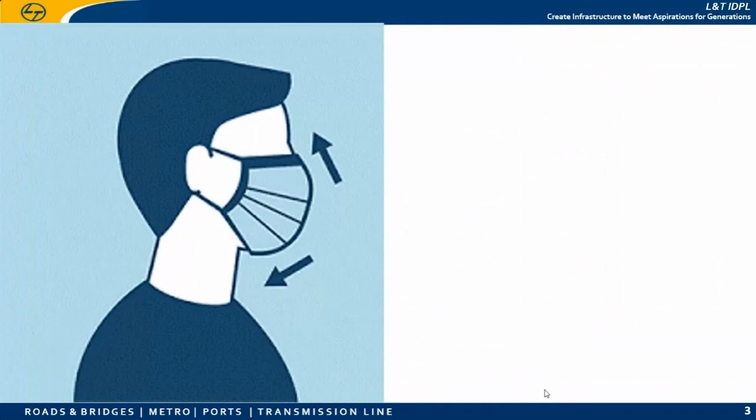Okay, so these two entry points are covered by using the mask. The same way, my dear friends, you have to provide adequate number of cover blocks at adequate locations. Before concreting, it is the duty of the site supervisor or site in-charge to ensure that adequate number of cover blocks at adequate location is very, very essential.

Now sometimes our people wear a mask covering only the mouth, but leave the nostrils open. But my dear friends, microorganisms can easily enter through any entry point, whether mouth or nose. If you close only one entry point, it will find the other.

The same way, my dear friends, if you do not provide cover blocks uniformly at adequate number and adequate location, then due to inadequate cover, wherever the cover is less—whether the requirement is 40mm, 50mm, or 75mm—that particular region will easily get infected.

Infected means it will get easily deteriorated. So what will happen? The rate of pH deterioration will be higher at those points, and the rate of corrosion will be very severe.

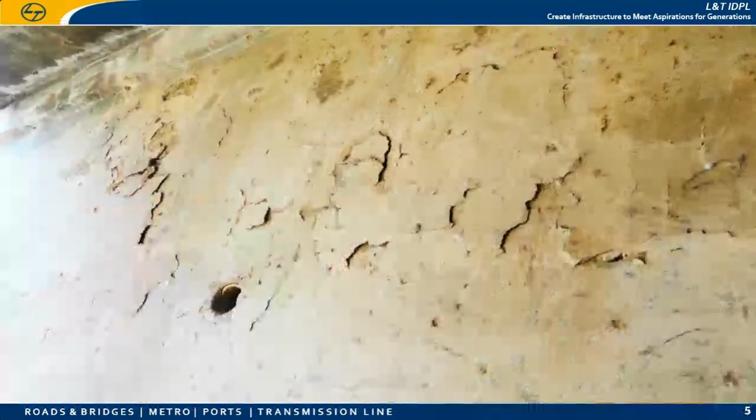Please keep this in mind. Now you see this another photograph, where the cover concrete is slowly peeling off, and if this condition continues, all will spall out. Now you see why a crack is running parallel to the reinforcement.

So why does this crack run parallel along the reinforcement? My dear friends, as I told you, due to the corrosion process, the volume of the steel gets increased. So when the volume increases, what will happen? It will develop a tensile force.

As everybody knows, concrete is very weak in tension. So due to this increased tensile force, a crack will be developed along the length of the corroded steel bar. That is why in a column, whenever you see a

parallel vertical crack, that may be a crack running along the reinforcement. So it is one sign showing that the reinforcement embedded inside is corroded.

Now, stains—so when you see stains on the surface, that is also another sign of corrosion. You see a crack running parallel to the reinforcement here. See, it is running parallel.

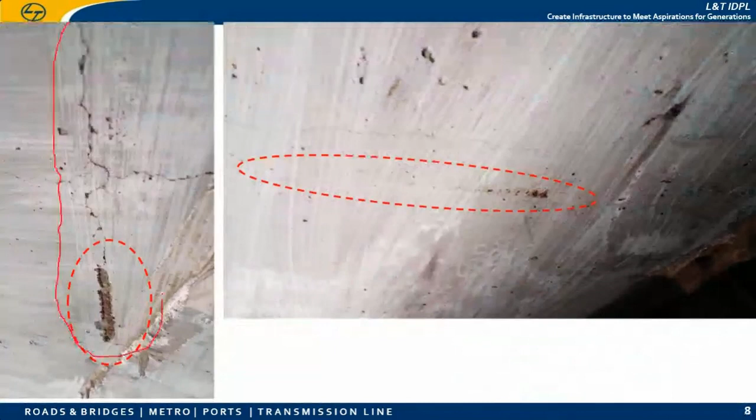Okay, so therefore the cover is very less. Wherever the cover is very less, deterioration will happen there. So the signs of corrosion are peeling of concrete, spalling of concrete, cracks running parallel to the reinforcement, and stains.

So my dear friends, I hope this is the bridge that you have seen in Nagapattinam. Am I right, sir? Am I right, sir? Yes, yes, it is. Sure, sir. Yes, it is, yes.

My dear friends, you have to ask yourself a question—why suddenly does a bowstring span appear? It is a continuous bridge constructed along the backwater. I hope the sea is here, so this is a backwater flow.

Why suddenly a two-span bowstring section, whereas adjacent spans are beam type? In buildings we call it a beam, whereas in bridges we call it a girder. Why suddenly? The purpose is, my dear friends, there will be some navigation—the boats which catch fish have to come and cross this bridge.

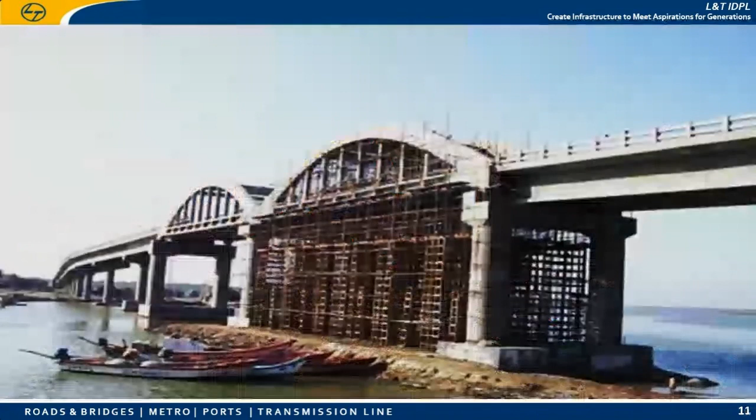I'm sharing a photograph taken during construction of the bowstring bridge, where you see how closely the supporting arrangement, props underneath, were provided to withstand the dead load of the superstructure. This was general practice in olden days because if a span is 50 meters, you can restrict the total superstructure height to 1.5 to 2 meters. So with this type, vertical clearance is maintained even at high flood level or high tidal wave level. That is why in this particular bridge, they provided two spans for navigation purposes, to accommodate rising water levels. That is the main purpose of introducing two bowstring spans.

How do these forces interact? It's something like how children play with a bow. In this bow, force acts in one direction toward this support and this support. This is the tie beam - like how you tie the bow with a thread from one end to another. That thread we call the tie beam. So in this tie beam, the force acts like this.

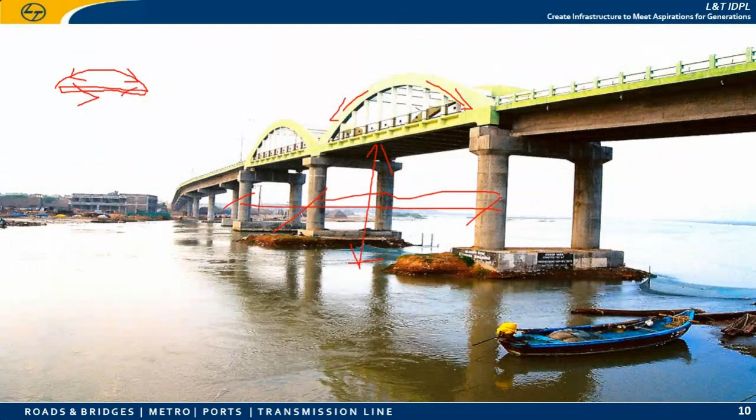In between, to increase stiffness, you introduce hangers or suspenders. The suspenders behave like a column, and the force distributes accordingly. So you can design with any sort of arrangement, provided you understand a clear picture of how the forces are distributed.

One more point to highlight is the superstructure. This photograph was taken after completing the painting of the superstructure. Why is painting required? Because you already provided adequate cover, which is like already having good immunity power. But why are you asked to wear a mask or wash hands even with adequate immunity? Simple procedures prevent infection, or minimize and delay the process of infection. The same way, in addition to adequate cover provision, painting externally is important.

As I mentioned in the earlier slide, there are three stages where concrete is continuously impacted by carbon dioxide, and since it is very close to the seashore, the chloride effect will be more. Therefore, an additional protective layer of paint, such as anti-carbonation paint, is essential to protect structures very close to the seashore. This is during construction.

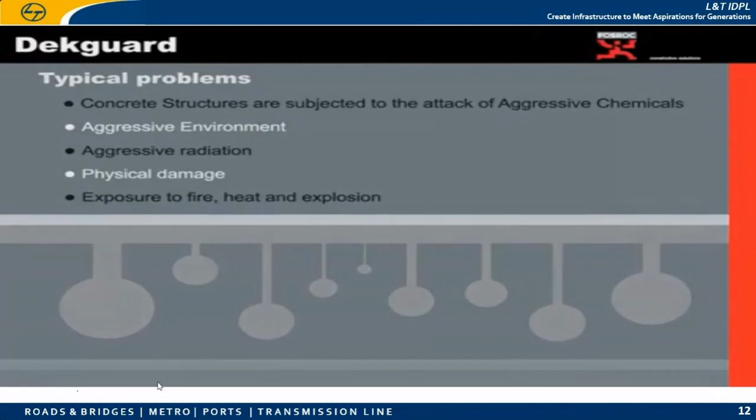To compensate or overcome all these problems, there are factors: moisture, breathability, UV resistance, aesthetical appearance, user friendliness or ease of application, flexibility, economics, durability, and last but not the least, environment friendliness.

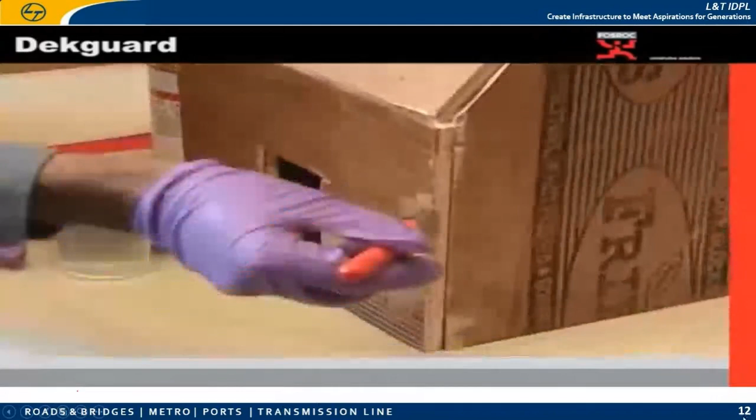The coating comes in 2 layers. The first is a silicon silane based primer, which is colorless. Since it's colorless, the main purpose of this product is it gets impregnated inside the concrete structure and prevents moisture from entering inside the building. Application is as shown. Once primer is applied, leave a drying time of minimum 5 to 6 hours. Once the primer is dried or impregnated inside the structure, then top coat is applied.

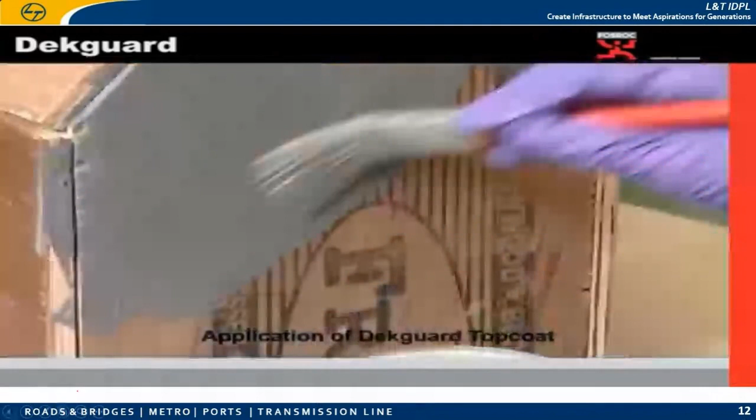Top coat normally comes in any color. It's a decorative coating. Before application, the product has to be mixed thoroughly, then applied like a normal paint on the drying surface. Being a decorative coating, it comes in any color suiting the customer's requirement. This product is generally acrylic based, which prevents the structure from carbon dioxide, chloride ions, sulfate, oxygen, and water ingress inside the concrete, thus making the construction a healthy construction.

To reinforce, Dekguard is basically a high-performance aliphatic acrylate dual-layer protective cum decorative coating system to protect the RC structures.

So this is a small video enhancing your understanding of the process of anti-carbonation painting, or protective painting, done on the surface of the concrete to minimize and reduce the rate of deterioration on the concrete.

My dear friends, you may think, sir, it is a painting, it is not an engineer's job, it is only a painter's job. But you have to clearly understand that the process of painting is defined by the engineers only. So you have to be very well thorough about the process, step by step procedure.

First the surface has to be prepared, then you have to apply primer. What is the curing period between the primer and the first coat of the actual anti-carbonation paint? Then if required, a second coating can also be taken up.

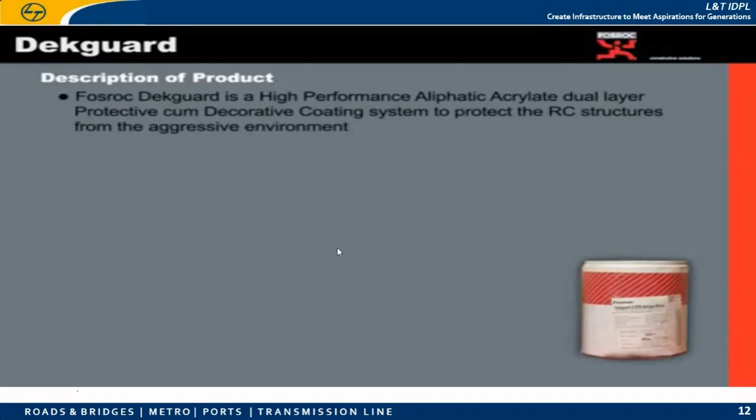One more important thing is, whenever you go for these types of procedures, first you have to see what is the date of manufacturing, what is the shelf life, and what is the expiry date. All these things have to be noted down.

What is the service life of the concrete structure? It is 100 years design life, which has to be met. So for that, maintenance is very, very important.

The responsibility - most people think the term quality is not related to the design office, that quality is related to site. It doesn't work like that, because the quality has to start from the drawing room. You have to qualitatively prepare the scheme, the detailing, and the procedure step by step, and that procedure should be user friendly.

You have to deliver all the details in such a manner that the site people are able to understand, because the language of civil engineers is drawing. So you have to be very clear in the deliverables. And prevention is better than cure - therefore, clear maintenance: routine maintenance, periodical maintenance, critical maintenance.

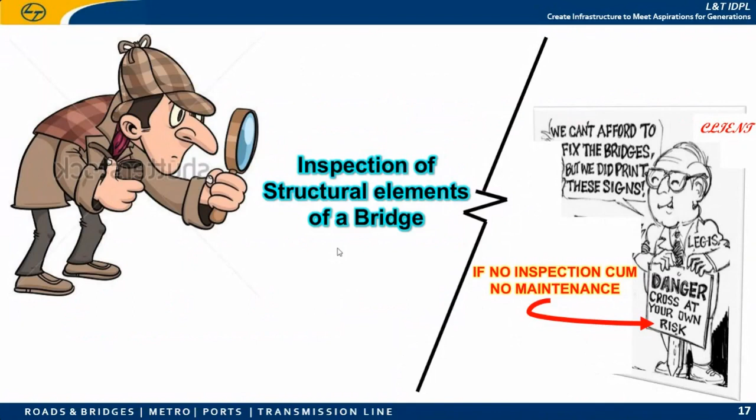So inspection of the element is very, very important. If the engineer only relies on what he hears or sees through mobile photographs, he cannot take a call. He or she has to inspect the site and understand the problem, just like doctors deal with patients, because here the patient is your structure.

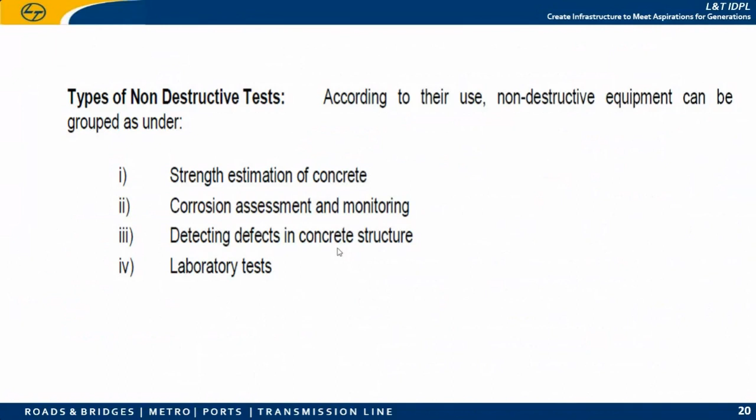Now, NDT we have explained earlier. This slide describes why NDT is required to estimate concrete strength, corrosion, and defects. The concrete surface may look very clear, but based on the surface look alone you cannot take a call. The inside structural concrete should also be free from voids, free from pores, and free from cracks.

Then similarly, cover meter. This test is not suitable to understand any of those things. You may ask, why is this test required then? My dear friends, cover meter is equipment that enables you to understand the actual cover. Your drawing may say 40mm or 50mm, but whether it is actually adopted at site, the cover will be seen and mapped. It's something like an ultrasound scan - you can see on the monitor the actual cover, the diameter of the bar, bar location, and bar spacing. Everything can be mapped using a cover meter.

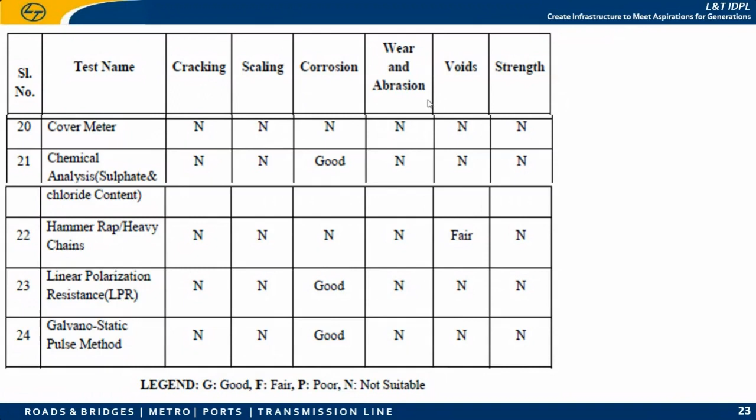Now UPV, even nowadays all colleges have an ultrasonic pulse velocity test. This is the test to understand the quality of concrete placed, whether it is free from voids or internal cracks.

So it has two transducers. One will be introducing the current, another will be the receiver end. It's the same formula as velocity equal to distance traveled by time taken. So the receiving end and the sending end. Whatever you see in this photograph is an indirect test. There will be a direct test where you can keep the receiving end of the transducer opposite to this location. Sometimes the site condition may not allow you to do a direct test, keeping your transducers opposite to each other, so therefore you have to go for the indirect test.

So based upon the velocity, you see that 4.5 above means it is excellent, that means the condition is good. When the condition of the concrete is good, then it will have the design strength, the characteristic strength. If it is below 3, it is poor. That means even though the surface looks good, internally it is having cracks, it has voids.

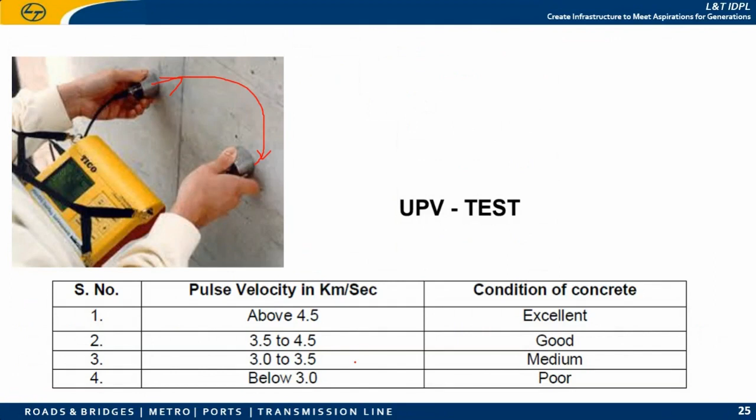Now then there are a number of other tests. The concrete core test is one of the laboratory tests, pH value test, chloride content test, sulfate test. So as per the need, the engineer in charge has to choose the respective testing.

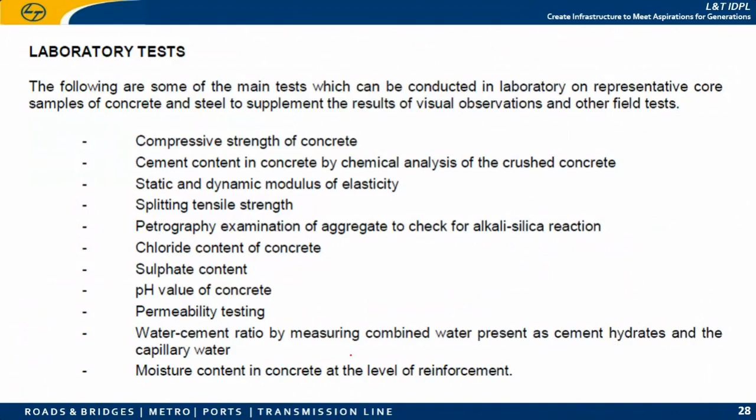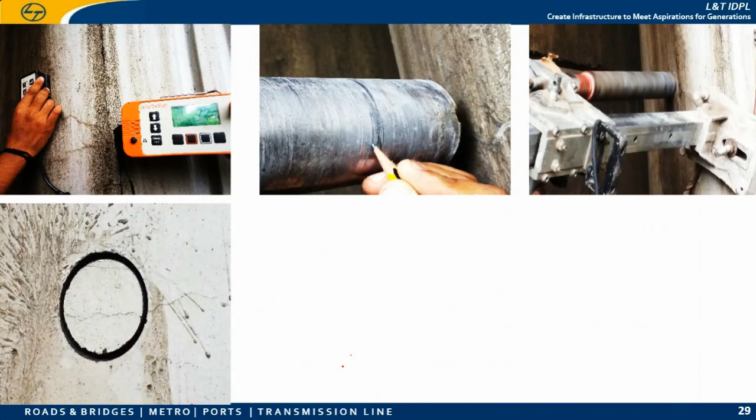Then you have to fix the drill bit on the concrete surface and start the activity. Then after completing, you have to remove the drill bit and take out the sample, just like how you take a piece of cake while cutting a cake. The same way you have to take it out, so there's no damage to the core. After taking out, you can see internally it is completely free from voids and steel is not exposed, therefore it is good.

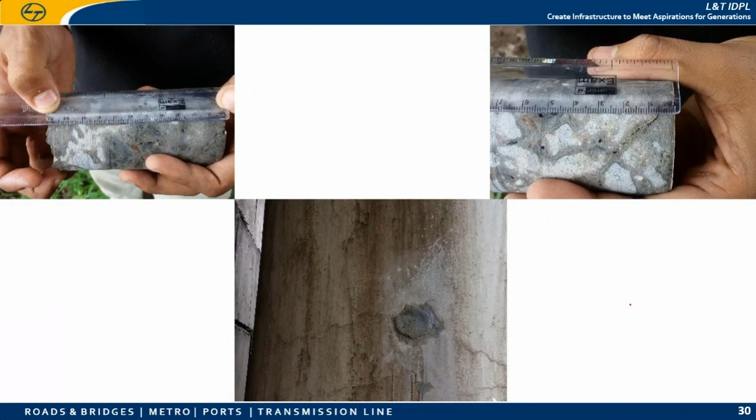Now, after taking out, if any cracks are there, you can even measure the depth. Then after taking out, it has to be completely sealed. You should not leave it as a void. It should be completely sealed with micro concrete or epoxy concrete so that it meets the parent concrete strength. So when you are filling it, you have to apply a bonding agent, because the bond between the new concrete and the parent concrete should be enabled. Therefore you have to apply bonding agent, then only you have to fill it.

So now this is the video where you will see the drill bit activity.

Madam, is the video visible now, madam? Yes, sir. I have just muted the sound. So you'll have a huge sound, so in order to protect your ears, I just muted it.

Okay, so this is how the activity of coring. Suppose your site condition doesn't permit you to go for core cutting. Now in that case, sir, how can I ensure the strength of my concrete implemented at the component?

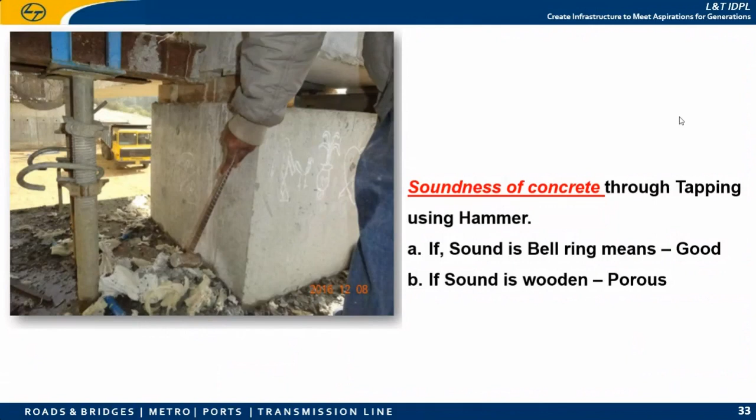Now this is another video of how to do the cracking repair.

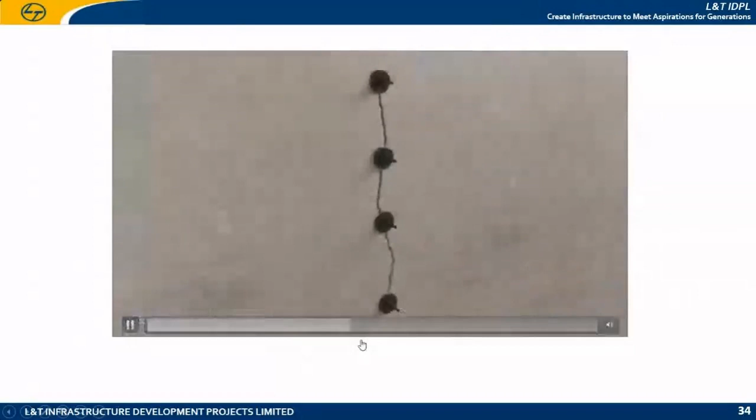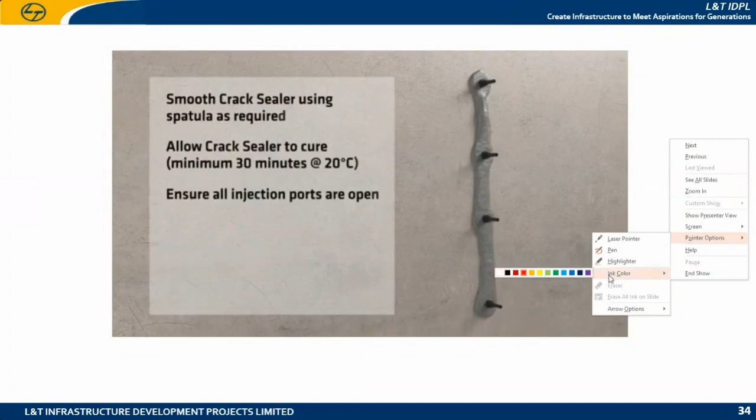My dear friends, in this video, you can see they are applying the repairing material. It may be epoxy resin or even PMC, whatever chemical they are injecting. Now what is the purpose when they are providing some injection point? Why is it necessary to seal this? Because whenever you are injecting here, the outflow should come out only at this point, it should not come out in between. So that is why they are sealing the surface all along in between the gaps, the ports, all along the length of the crack.

It is completely sealed, so that when you inject at this point, against gravity, this resin flows. You have a fast flowing resin and a low viscosity resin also, so as per the site condition, you can select it. Even a 0.1 mm width crack can be closed. So when you are injecting, it will slowly move, and if this area is not sealed in between the ports, whatever you're injecting will come out and will not pass through the other areas. That is why, after fixing the port, the outer surface along the length of the crack is completely sealed.

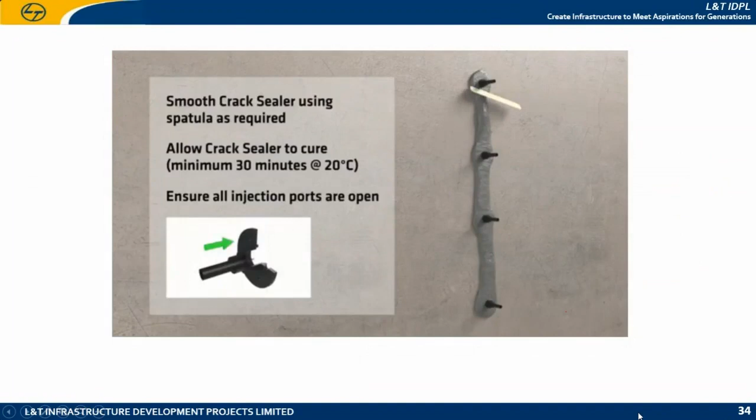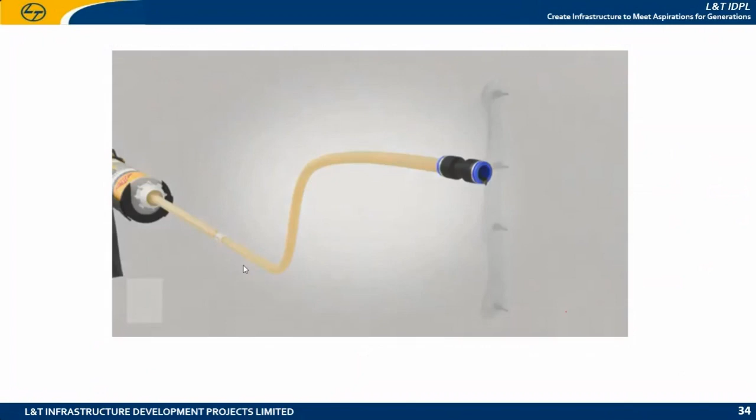One minute. And it is leveled. Why this is done: before applying, you have to ensure that no foreign matter is present in the flow of the tube, or that it should be free from air bubbles.

So my dear friends, in this way you have to seal the crack.

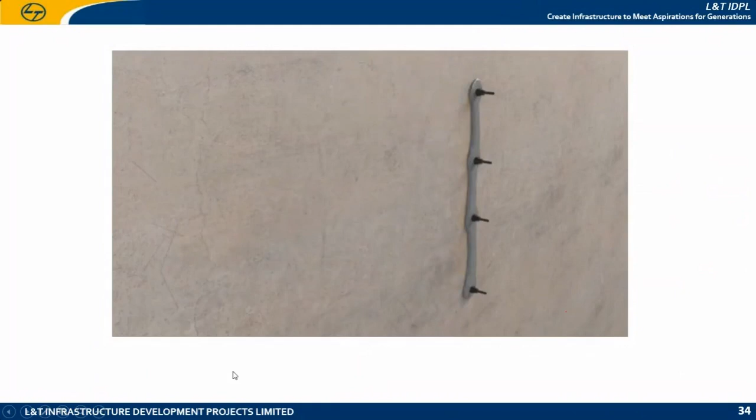My dear friends, this method cannot be applicable for all cases. First of all, it is the duty of the engineers to understand whether it is a structural crack or non-structural. Repair is the term which involves the process of restoring some damages. The damage may be a crack, or it may be removal of tiles and replacing them. So this term repair doesn't involve the strength parameter.

Okay, my dear friends. Now I'm going to share these upcoming slides with application of how the cracks are sealed with the help of monomer. Monomer is one type of polymer. It is used to close the crack under the honeycombs.

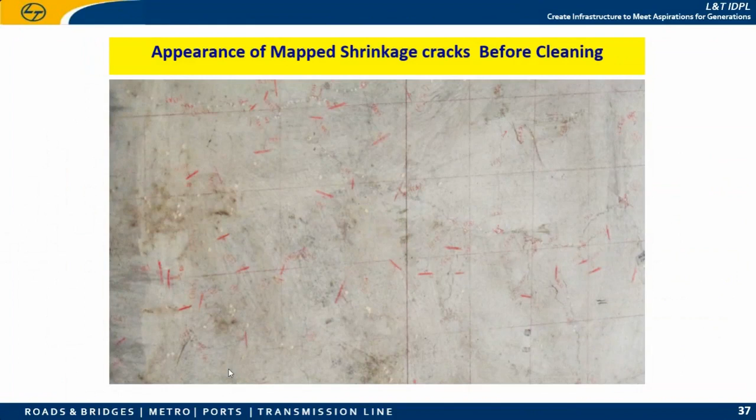Now, first you have to map the cracks, whether it may be a shrinkage crack or plastic shrinkage crack. These are all applicable only for non-structural cracks. Then after mapping, it should be cleaned. Step two, the surface has to be prepared.

Sir, you can say when the code itself is allowing, why do I have to go for crack sealing? Because through these cracks, these are all something like gateway openings where you are welcoming moisture to penetrate, where you are welcoming carbon dioxide to penetrate inside, because concrete is a porous material, so it will easily enter inside and increase the rate of corrosion. It will affect the good structural concrete, it will affect the good structural steel. That is why it is always necessary to seal the surface crack.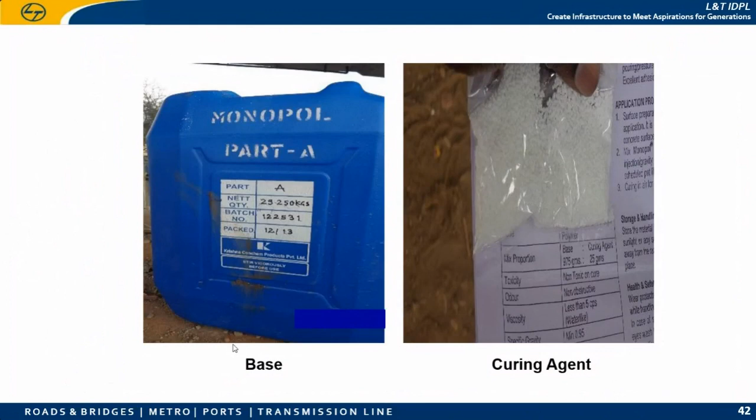Now this is the view of that Monopol polymer resin inside the container. My dear friends, when the mixing of the material has to take place, you should not mix it with a wire brush or with a stick. It should be mixed using a mechanical mixer, because uniform mixing is also very, very important in playing a vital role to meet our requirement, because all these are chemicals. So a small error, a small mistake at any level of application will always result in not achieving the purpose or design strength.

So the pot life of this material is only 30 minutes. When you open the container and take the liquid out, you have to apply it within 30 minutes. Otherwise, it will become like a gel. So the site supervisor or in-charge has to keep in mind 3 things: one is the manufacture date, what is the expiry, and what is the shelf life or pot life.

Now, when you come across a sunken slab, what is the procedure? This is something related to our childhood days. We might have studied a story where a crow will come and stand on a pot, and the water will be at the lowest level. So what it will do is take a few pebbles from the nearby area and keep on adding them. So the volume of water will rise due to the addition of pebbles, and it will come to the level where it can easily take the water through its mouth.

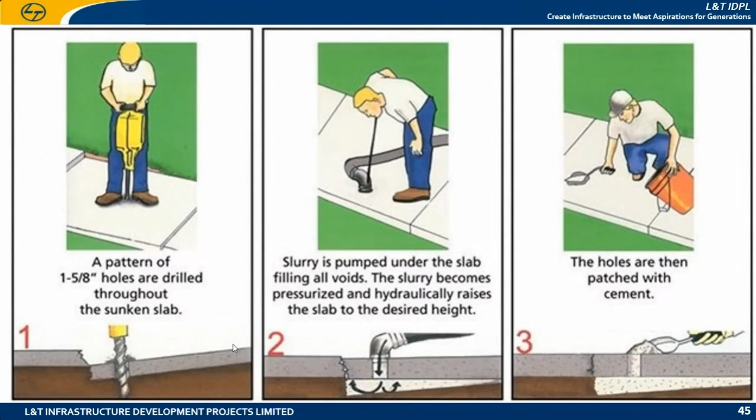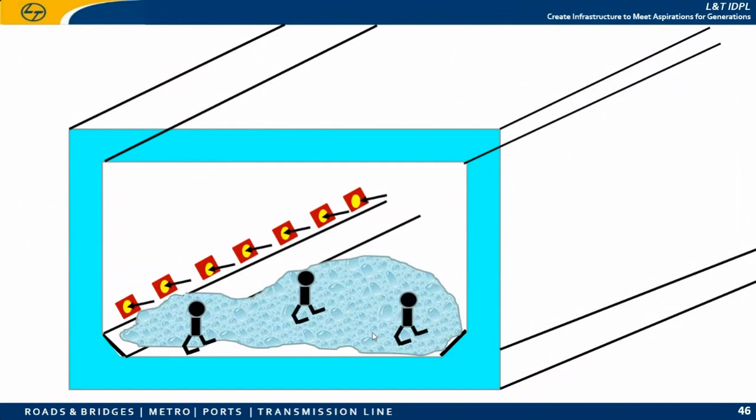First, as I told, the engineer who is going to be involved in this treatment procedure has to understand the problem and identify the source, the root cause of the problem. Then he has to map it, then apply a suitable method and a suitable material. Now, the root cause for this is, along the construction joints, the water is seeping inside or dripping inside. So this is the view of water stagnant inside.

Now you see, all along the sideway of the side wall, the locations have been mapped. You can say, sir, whenever water comes inside, I can pump it out, why do I have to go for repairing? My dear friends, you have to put a once-for-all end to this problem, so that the pedestrian usage will be continuous.

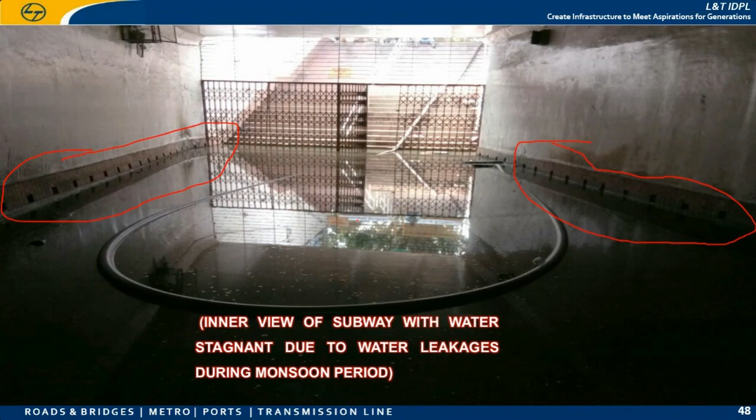So now the material used here is polyurethane. It is a polyurethane material which is chemical. When it is injected and reacts with water, it will not dissolve. Due to its hydrophobic reaction, a hard bound elastic foam material will develop, and this foam material, being elastic, will resist the water seepage. So therefore, even when the water table rises on the outer face, the water will not be able to come inside.

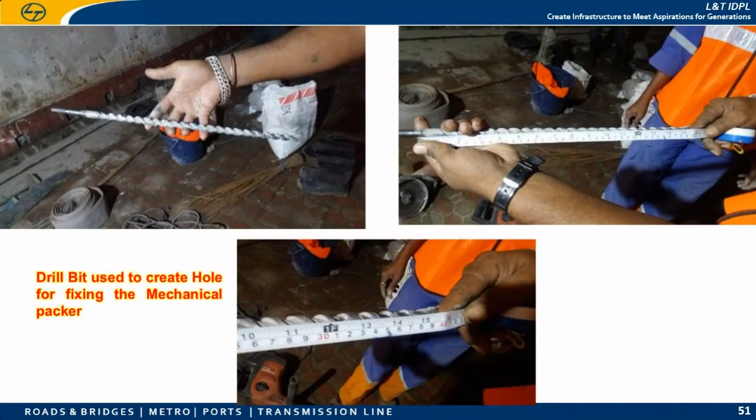Now the procedure is through this mechanical packer, through which it is injected. The mechanical packer should be packed firmly in the concrete, so that when you are injecting the chemical, due to this pressure, this mechanical packer should not get affected. Now this is the view where it is completely sealed.

Now when the mechanical packer has a control valve, when you open the control valve, the water is bursting out. So therefore, the mapping is correct.

Now this is the machine used to inject this material. It comes in part A and part B, and you have to inject in a 1:1 ratio. To avoid confusion from the starting point to the ending point, the two tubes, part A and part B, are color wrapped. Green means A, red means B. So from start to end, the workers involved will always insert the tube into the respective A and B container.

There will not be any mix up. Sometimes after the end of the first batch, by mistake they should not insert A into B or B into A, because it is a complete chemical reaction.

Now this is the gun through which the chemical will be injected at 1:1. Before injecting, you have to flush out. Now this is the view of injecting.

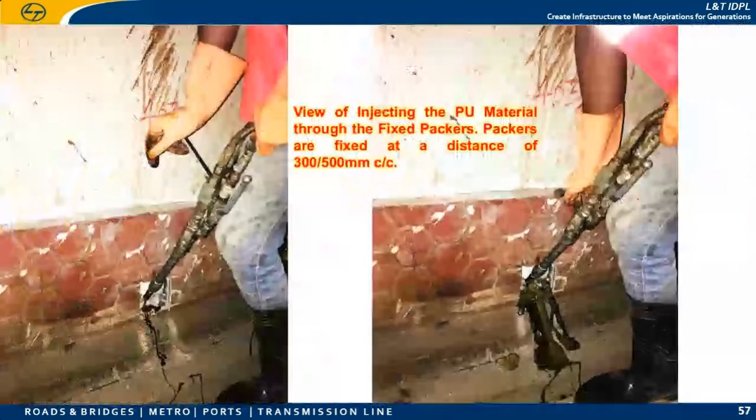During the process of injecting, it is always very important to collect the sample, and you have to write all the details. The engineer in charge or supervisor has to collect the sample during the injection process. He should not collect the sample from the container. Then all the details of date, time, and the packer location have to be written.

And to understand the hydrophobic reaction, when we add a few drops inside the collected sample container, you see a hard-bound foam develop inside. This is how the process will take place inside the concrete also.

You see, after injecting, since it is a low viscosity fluid, it is traveling even against the gravitational force.

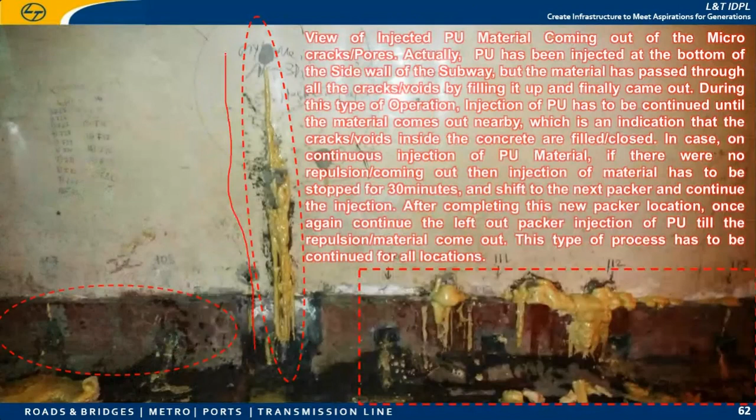You see, here it is injected, and it is coming out over here. That means it fills all the minor cracks which are not visible to our naked eye. All the voids, everything will be completely filled.

Now all the hard-bound waste material has to be collected and disposed of. My dear friends, sometimes a small quantity may remain in part A or part B. You should not mix it. This should be avoided, thinking that you are going to save the quantity.

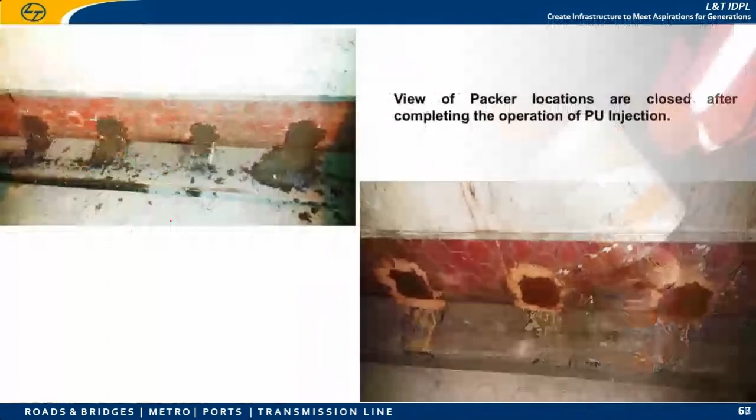Nothing. Repair and rehabilitation is an art. You cannot take any risk. It is a one-time solution. And finally, it has to be sealed. After the end of every container, the in-charge has to write his signature, and mark it empty and dated. Everything has to be marked.

Now, so far we have seen the process of repairing. Now, rehabilitation is a process where you are retaining the component or structure to its original good condition by adding value to the strength. So whenever you are involving the strength parameter, the process is called rehabilitation. The process of jacketing is one form of rehabilitation.

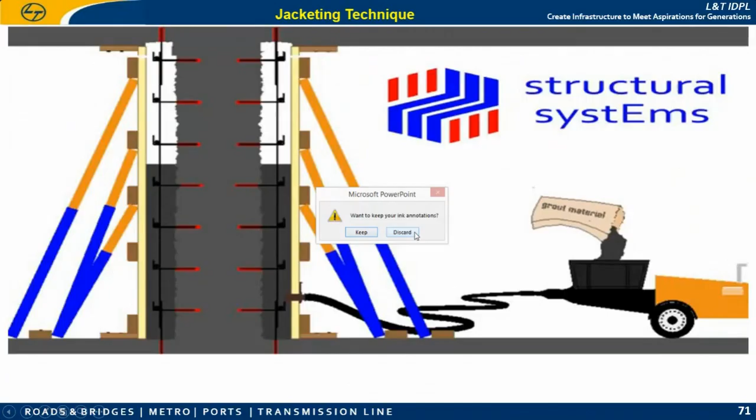So this is a small video to understand the concept of jacketing. Why is jacketing of a column important? Jacketing is a process that can be done for a column, beam, or anywhere, as per the requirement.

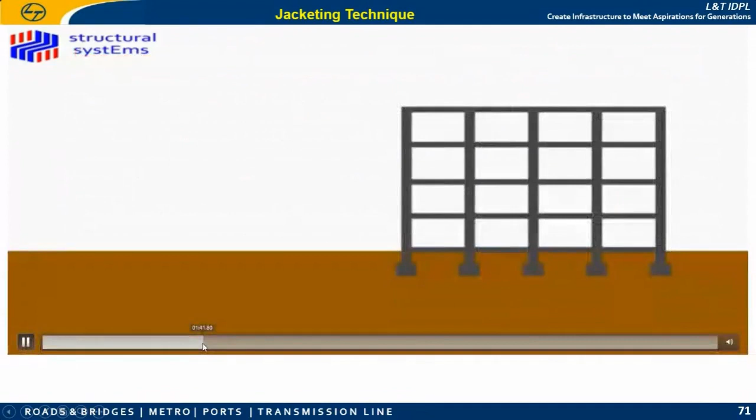Step 1, prepare the surface. Step 2, mark the new reinforcing bar location and prepare it. My dear friends, anchoring the new reinforcement into the beam is very, very important, because in the method of jacketing, you are increasing the geometry and adding strength.

So anchor it, then your new column area will get increased. Your new column surface area has to behave like the original. So the anchoring of the new reinforcement into the beam or slab at the top is very, very important. You have to adapt the same anchorage length and development length. Everything has to be followed the same way.

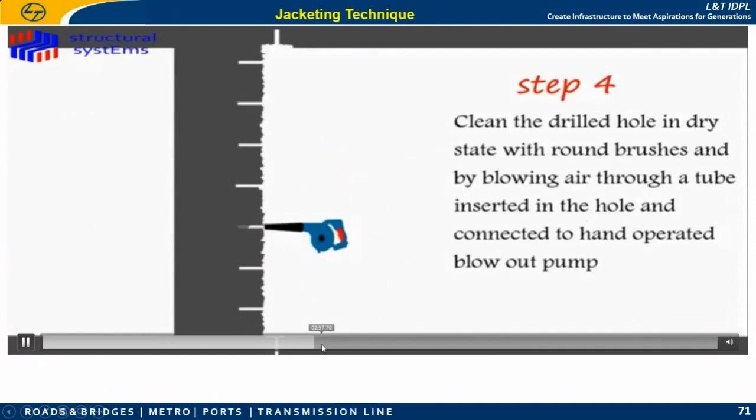Step 4... sorry. Then step 5, you have to do the epoxy injection and drill for the new reinforcement. Then you have to fix the longitudinal reinforcement.

Then you have to put the shuttering. The shuttering should not have any voids in between, because when you fill the concrete, it should not come out. So it should be completely encased.

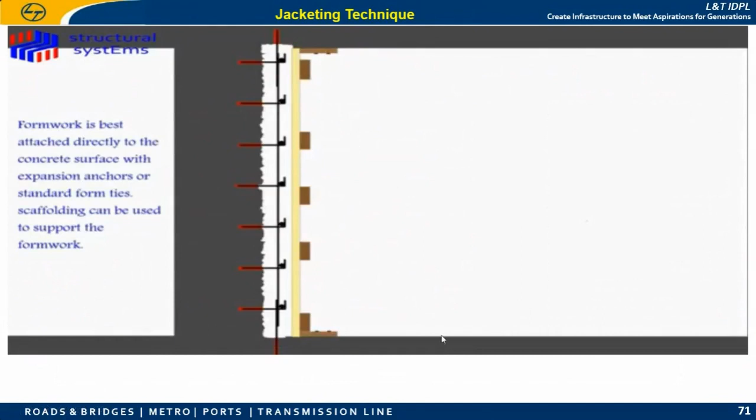Then you have to bring your mixing machine and apply the concrete. This concrete should also have the original parent concrete strength. So the design strength of the concrete should be the same.

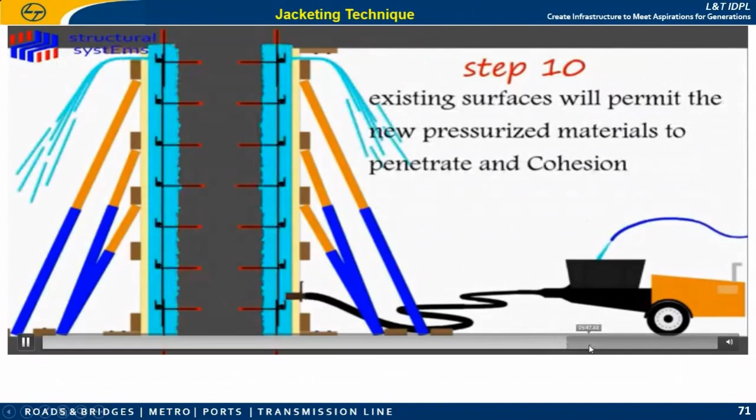Then you have to apply it so there should not be any cavity. Okay, my dear friends, so this is a small video to understand the concept of jacketing.

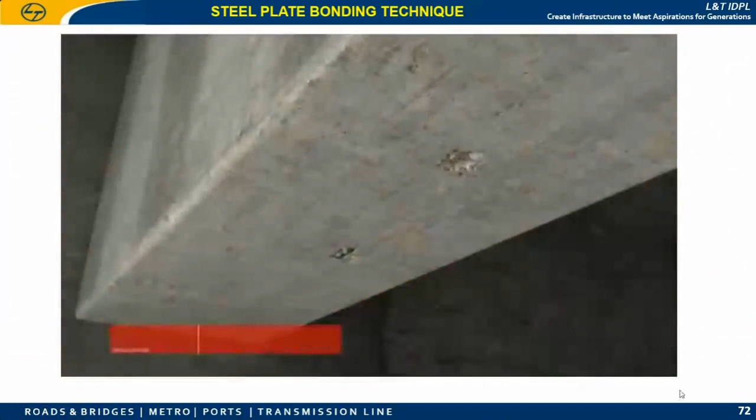Friends, this is the equipment we discussed earlier, the cover meter. To understand the actual cover, because when anchoring the steel plate, the anchor bolt should not disturb or injure the reinforcement inside. By using the cover meter, you can understand the actual cover, the bar diameter, and the spacing. Accordingly, you have to find the suitable location where you can anchor it.

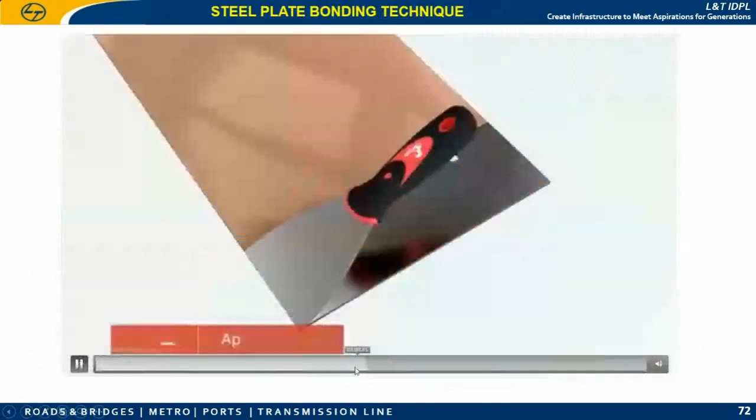So after mapping, you have to drill the anchor location inside. Now this is the steel plate. The steel plate surface should be prepared well.

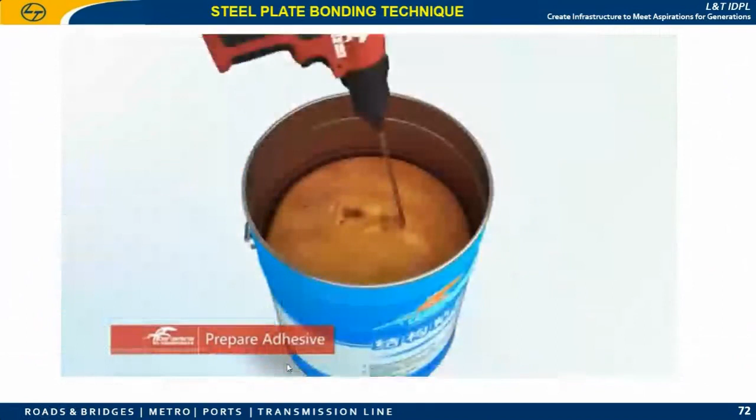This is the mechanical mixer. You should not use any hand mixing.

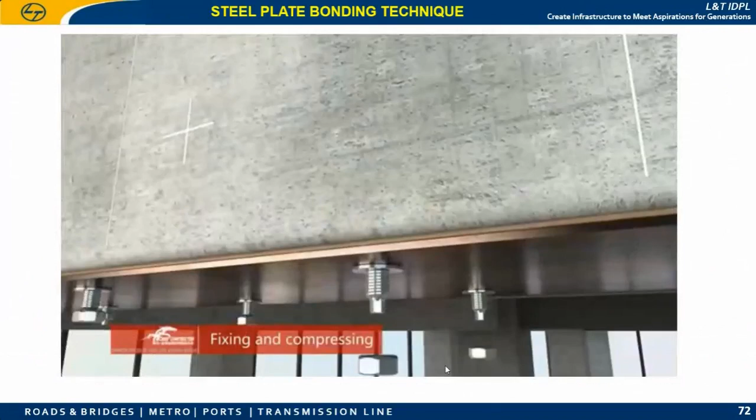See friends, this oozing out, it should be very even. This material is going to play a bonding role between the steel plate and the concrete surface. When this bonding is good, then the purpose for increasing flexure strength and the purpose for increasing shear strength will be achieved.

Yeah, this is also very, very important.

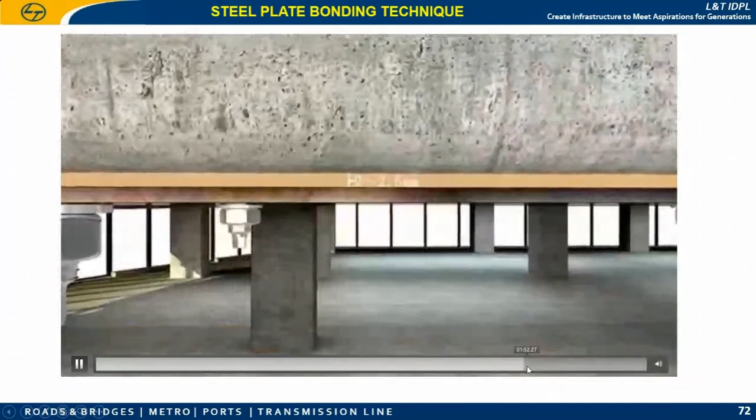So here they have used tapping. When you tap the steel plate bottom where you have anchored, you should not hear any void. If you hear a void, that means there is a minor gap between the steel plate provided and the concrete surface. When voids are there, the load transferation, whether in terms of flexure or shear, will not take place. So that is another method of rehabilitation.

Now the other method is wrapping, the CFRP wrapping system, carbon fiber reinforced polymer. This is to understand why it is essential to go with the CFRP wrapping.

Madam, I request you kindly give me another 10 minutes so that I can complete it, madam. Okay sir, no problem sir, you carry on, carry on sir. Kindly bear with me, sir. Okay sir, okay sir, thank you madam.

Friends, you have to understand when doing compressive strength testing in your concrete lab, why this concrete undergoes development of cracks. Why is it happening, whether it is because compression is happening? You have to keep in mind that concrete is strong in compression. Then why do cracks appear when you increase the load? Please think about what is the behavior, what is happening, because that is also very, very important.

The important fact is when concrete is very good in compression, why do cracks suddenly develop? You have to understand that while you are applying load at the top, at the same time the bottom surface experiences an opposite reaction. That means the concrete material placed inside is under tension. Since concrete is weak in tension, when it reaches its limit of tension, it expresses its failure in tension through the pattern of crack development. So the crack development in a concrete specimen under compression testing is not because of compression. Please keep this in mind, and you should not forget this till the end of your life, till you are practicing.

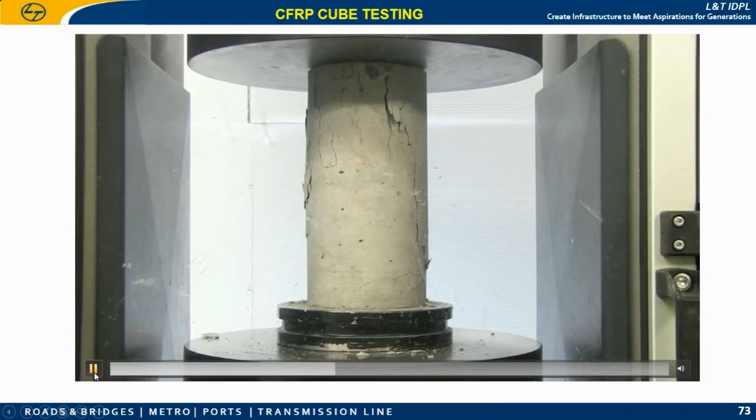Then we took the column wrapped in SikaWrap. So now one cylinder is tested without the wrapping system, and next we are wrapping the same cylinder of the same grade, say M25 or M30. Now how is the wrapping going to add value in terms of strength? On goes the compression force.

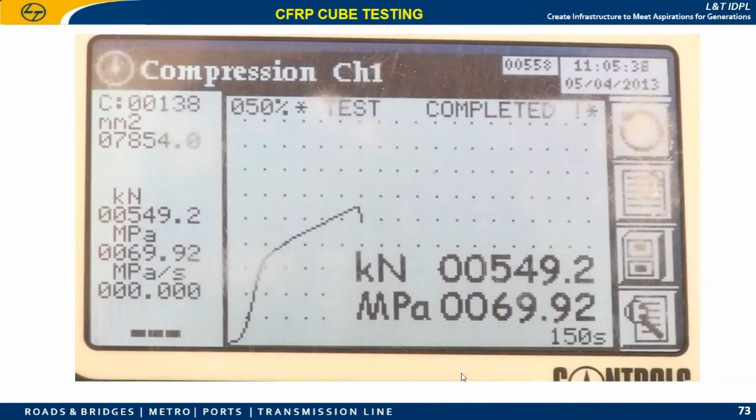At this point, the unwrapped column will fail. When subjected to double the compressive forces exerted on it, finally the SikaWrap wrapped column fails. So my dear friends, you have just seen earlier it was some 260, now it has doubled. That means after adding the wrapping system, it had an added value to increase its strength. The strength may be with reference to flexure strength, shear strength, or compression strength, whatever may be the type. So CFRP is one method of rehabilitation intended to add the strength parameter - that is rehabilitation. This video is why we are going with the CFRP system.

Now this is a small video which you will be seeing. CFRP does not only come in sheet form, it also comes in the form of laminates. A sheet is just like if you visit a cloth store, you will see a pant bit or shirt bit - it comes like that. It is made of carbon fiber reinforced polymers, and it has a high tensile strength, 2 to 3 times more than concrete. Now in this video, you will see laminates.

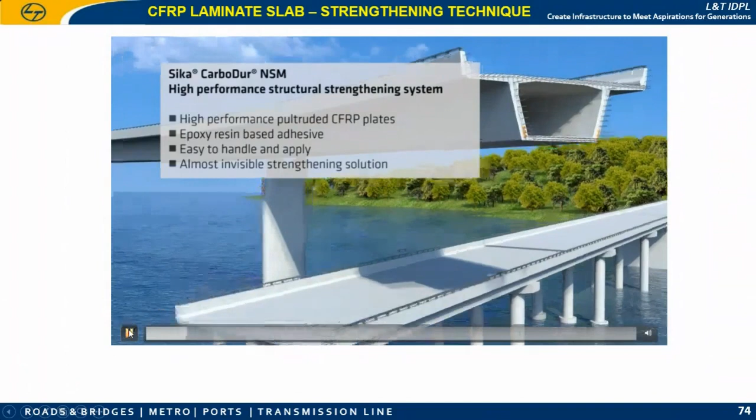Every time you are involved in rehabilitation, the first thing you have to do is map the existing reinforcement.

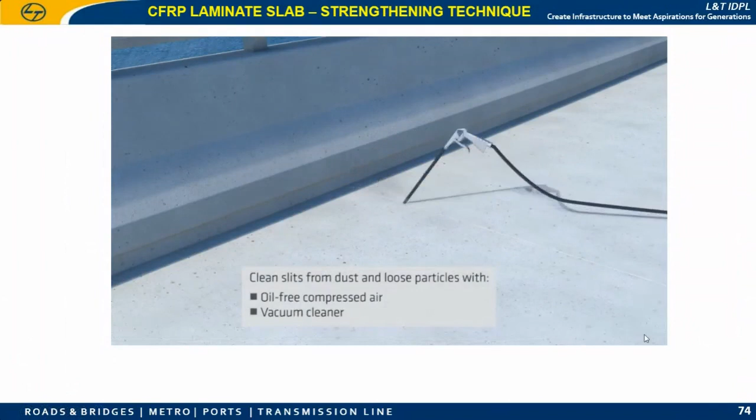This video shows negative reinforcement to increase strength at the top. If there is tension at the top, I cannot go by jacketing, breaking all the existing concrete and putting new reinforcement. That is not possible. So another method is to go with a wrap CFRP laminate.

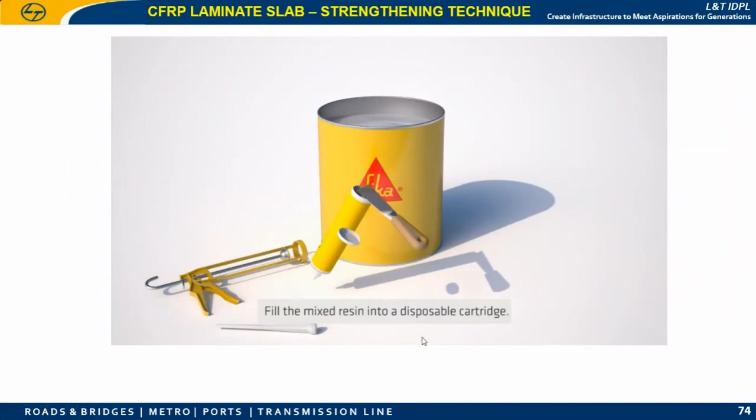So to the required length, the laminates are cut, cleaned, and coated with the saturant, then applied at the marked location on the top of the slab.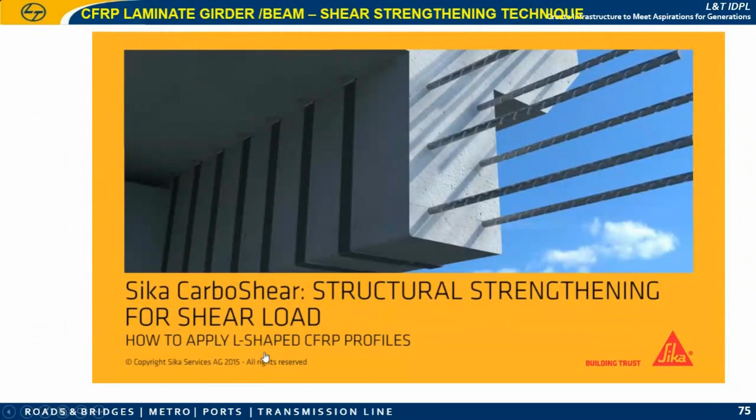Then you are pasting your laminates. In this way, you can increase the tension if you want to introduce some new tensile strength at the top of the deck slab. Now, if I want to increase the shear strength, the same laminate is going to help.

My dear friends, here the laminate is going to act just like a stirrup, increasing shear. The anchorage of the laminate inside the slab is very, very important. That is why this video shows the process.

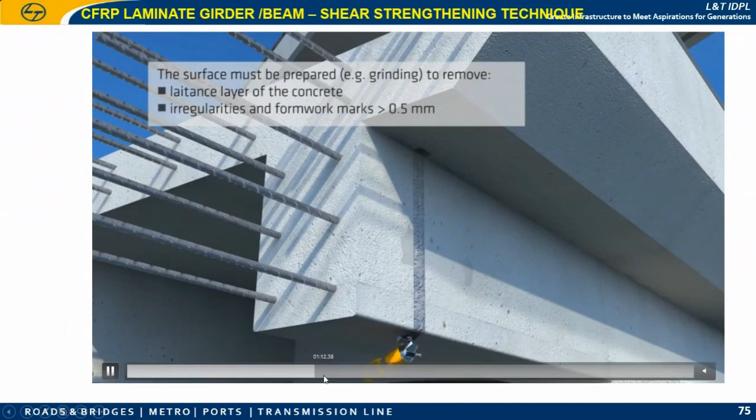So drilling a hole inside, removing all the concrete powder. Then the place where the laminate is going to be pasted is prepared through surface preparation. It should have no sharp edges. It should be even and smooth.

Then the preparation of the chemical for pasting this laminate. The curing time is 24 hours.

Then you have to mark the width of the laminate to be pasted, then apply that resin over it, then inject wherever it is anchored. It also should be bonded with the original parent concrete.

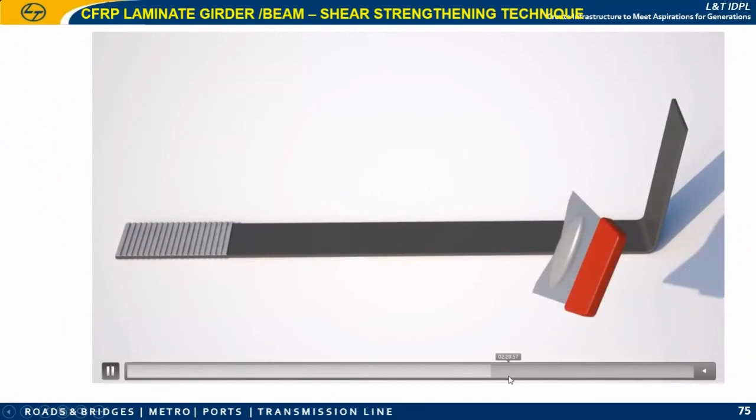Now you have to put a roller so that it gets firmly fitted on the surface of the component. The same way on both sides, because you are going to increase the shear, so it acts like the behavior of a stirrup.

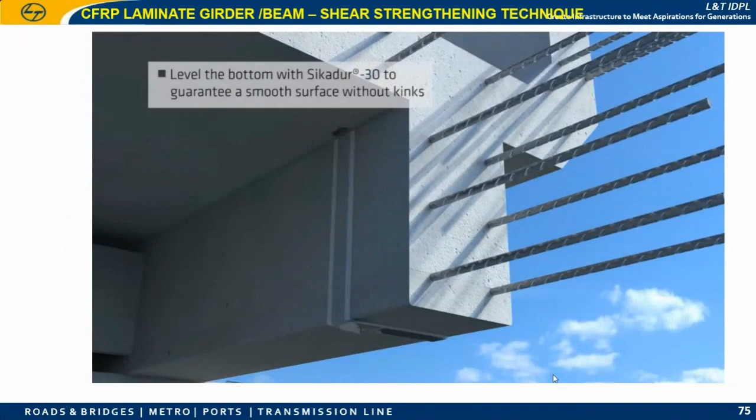But nevertheless, whatever method you use, you should not forget to maintain the anchorage length and development length. When using laminates, they come as a small strip, say 100 mm width, with 0.1 or 0.3 mm thickness also available in the market. As per your design requirement, you have to choose the right thickness of the laminates.

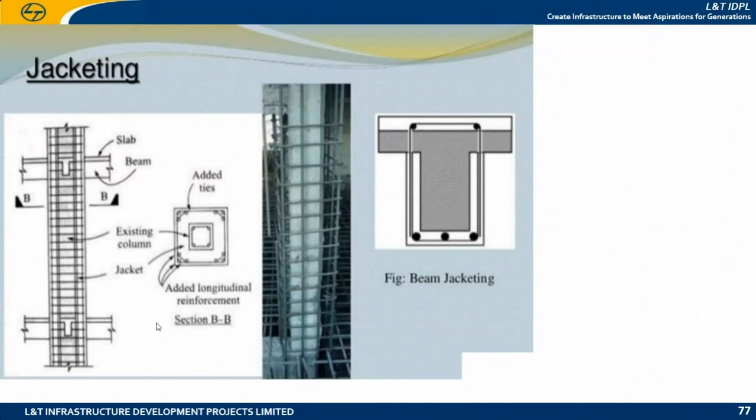Because the stirrups not only add value in terms of shear, my dear friends, you should never forget this term: confinement. Confinement is a beautiful term that is involved in our detailing process. That is the term which holds the main steel firmly when it is subjected to load.

In terms of a column, when your load is acting along this axis - the difference between a beam and a column, whenever you ask students, they always say a beam is a horizontal member, a column is a vertical member. In addition, the column is a member where the load is always acting along its axis. That is why the column is subjected to buckling.

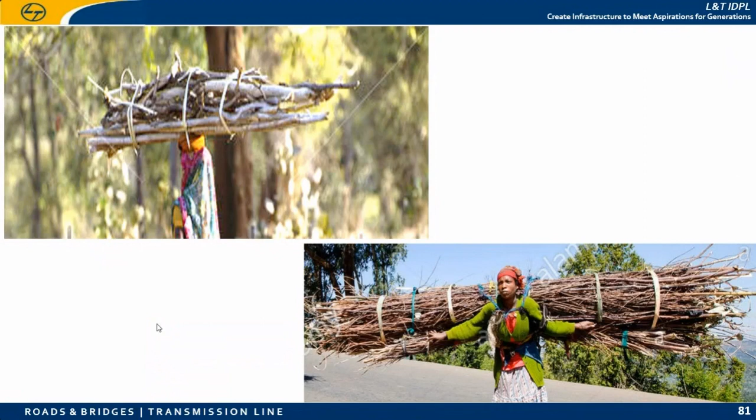First step, removal of all, preparing the surface. No sharp edges or grooves, it should be smooth. Apply primer, apply saturant, then you have to roll it as per the direction of increasing the strength parameter.

Now this is the actual, in our project we always used to get more than 70 to 80 years. How can I make the old bridges physically fit to carry a heavy load? So I have to increase its strength.

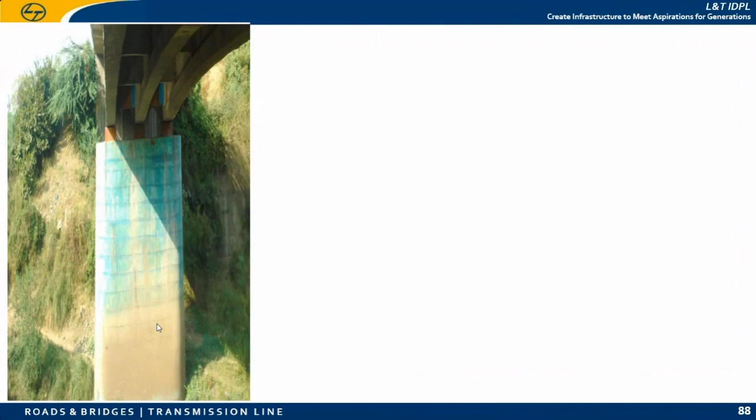So I cannot go with jacketing. My easiest way is to increase the strength by using the CFRP system. This is the laminate system.

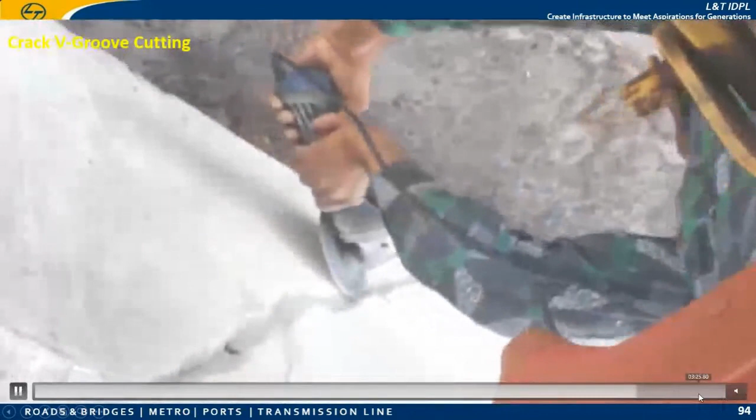This is a small video, my dear friends, to understand physically how the cracks are cut, V groove cut at the site. I'm just rushing up. You should not use a chisel like that, okay.

Now after V groove cutting, it has to be filled with epoxy or PMC as per the site requirement. Then you have to anchor it.